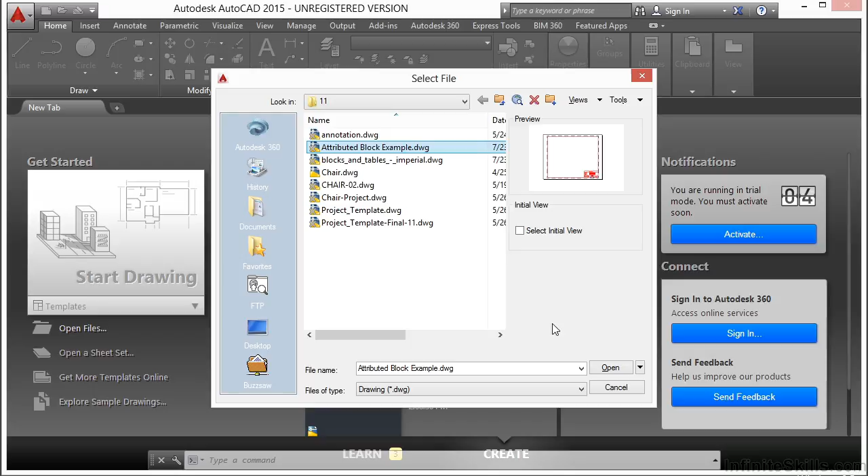This file contains an attributed block that has been inserted as a title block for this drawing. It's right here. So you can see when I hover over it, it looks like it's a block. When I select it, there are a lot of different grips in here. That's for the attributed text. This item here that says prepared for, that's just regular text. I can't edit it or change it or do anything to it.

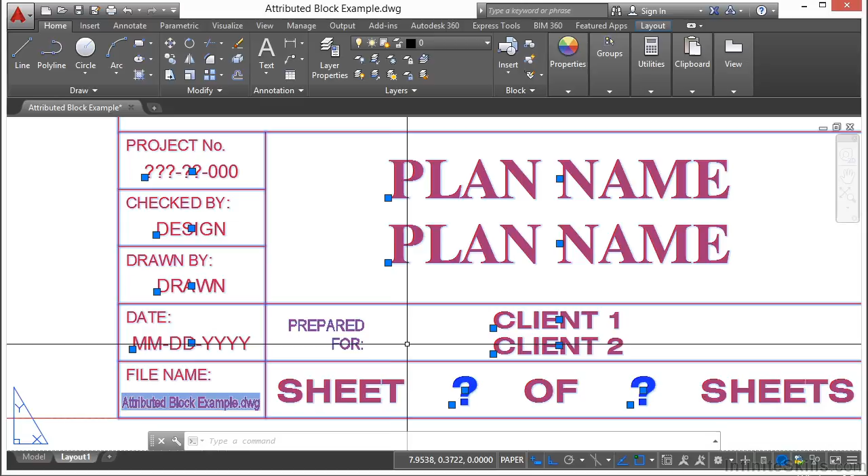Now to edit the attributes of a block, you can double click it. That brings up the Enhanced Attribute Editor window. Here you can edit the text to display what you need it to. We drag this to the side. Here you can see this attribute has a tag. It's called plan, and you're prompted with a plan name number 1 and the value. Plan name or value here is the actual text that is displayed in your drawing.

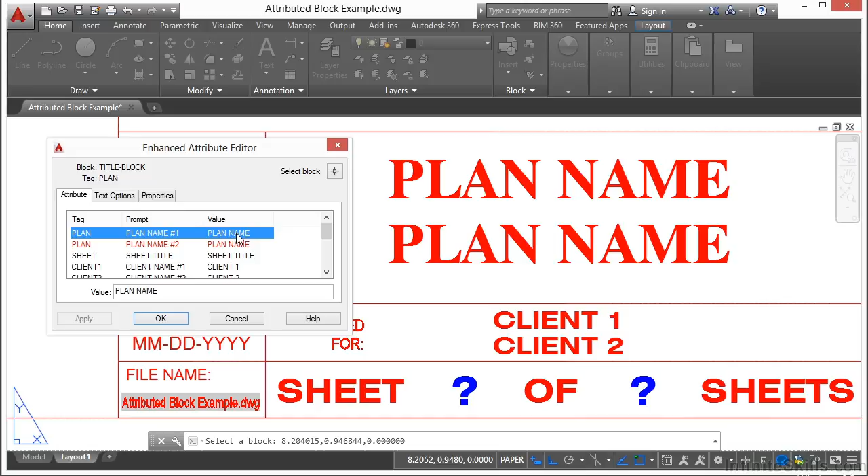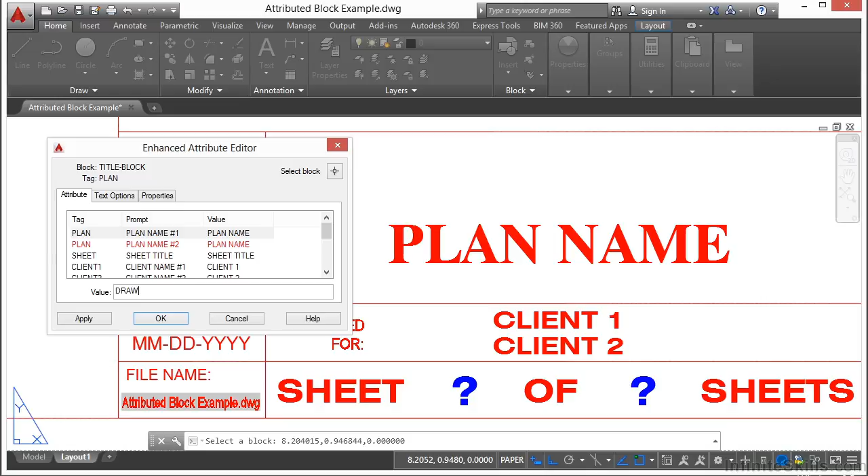To edit that, I click in this box here, and I just change it like I would in any regular text editor. I'm going to call this drawing title. When you're finished, click OK, and you've changed the text in your title block. Title blocks are very commonly used with attributed text. This allows everyone's title block to be formatted exactly the same way and give your drawings a uniform look.

Now here's a quick tip. If you only want to edit one field of data, hold down the Control key and double click on that text field. When you're finished, just left click somewhere off on the screen. Now if you double click it, this gives you access to everything here that you can change.

I can call this sheet title as an example, which is right up here. I can say whatever I want it to be. When I'm done, press enter. Client name, I can just say ABC Company. Click OK, and you can see here that I've changed some of the information on it. Now let's say, for example, I only need one of these lines. That's easy enough. Put a space in there, and now it looks blank.

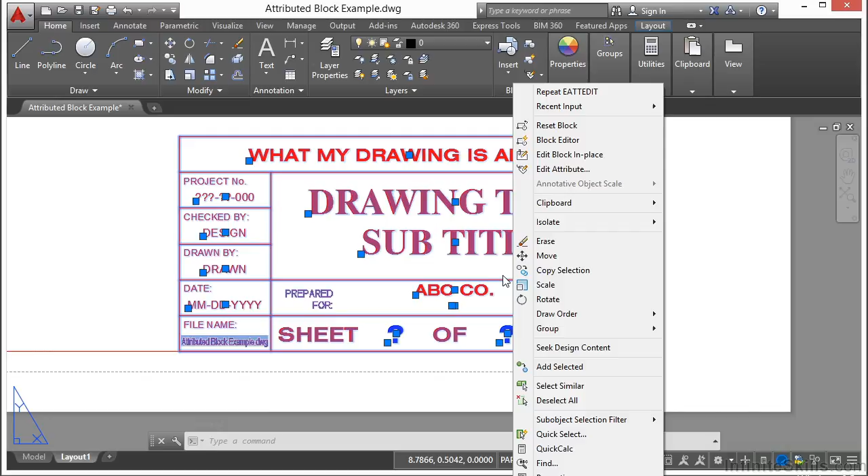Now to create an attribute in a block, you have to create an attribute definition. It's sort of like creating text, only there are a few more definitions to assign. So let's edit this block right here. So select it, and then right click on it, and go to the block editor. I'm going to close this because we won't really need that. It's just going to get in our way. Each one of these objects here are attributed text. If I double click on them to edit them, I get these three options.

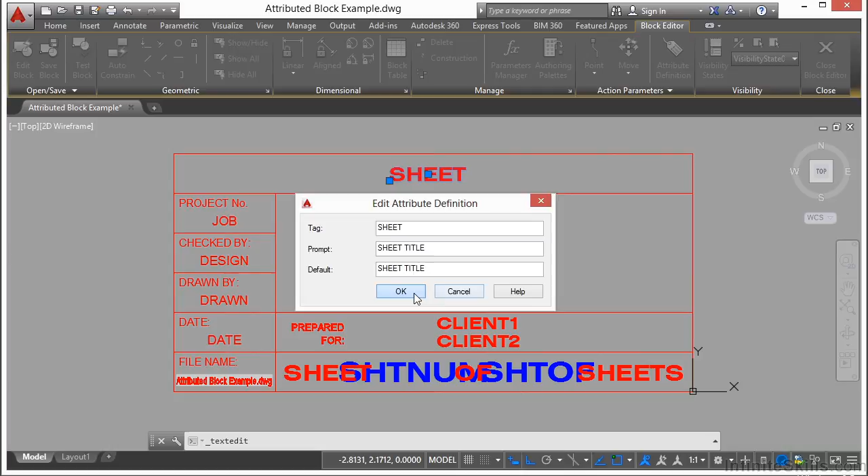I have the tag, the prompt, and the default. The default will automatically fill in this information for you so the user doesn't have to. It's sort of a placeholder. When you're finished, just click OK. Now these have grips so that I can position them however I'd like.

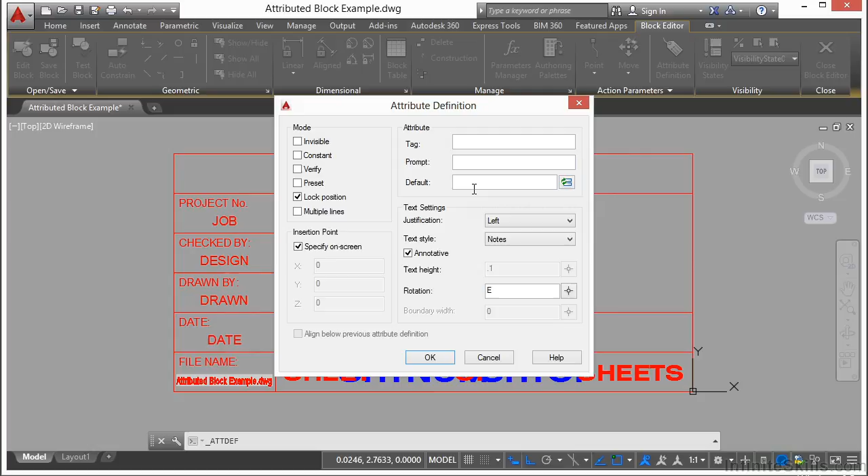And if I want to create a new block attribute, I just come up here to the attribute definition in our block editor ribbon. So this is the attribute definition. I have a lot of different items that I can pick from here, like justification, text style. I can make it annotative or not. I can change the text height. Mostly what you're going to do is enter in your tag, prompt, and your default information.

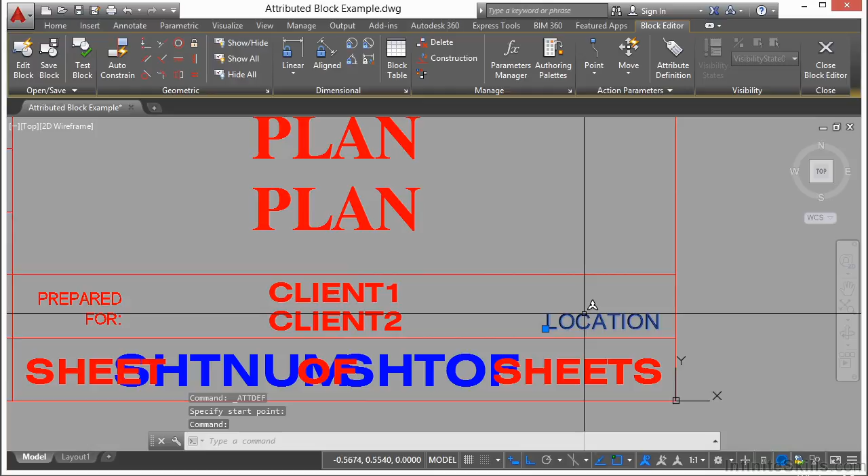So let's say I want to make a tag for location. Now a lot of times you're just going to enter in the same thing, location, location, location. Now when I click OK, it wants to know where I want to put it. I don't really have a spot for it in my line work. I'm just going to put it right over here, just for now. And that's where it is. Now you can also look at things like layer, size, etc.

Now let's select any attribute. I'm just going to pick the one that I just created. Right click on it and select the attribute order option right here at the top. Now this window opens up the attribute order window. This will allow you to edit the order the attributes will be listed when you edit the data fields of an attributed block. Now, it doesn't physically change them in any way, just the order in which they're listed.

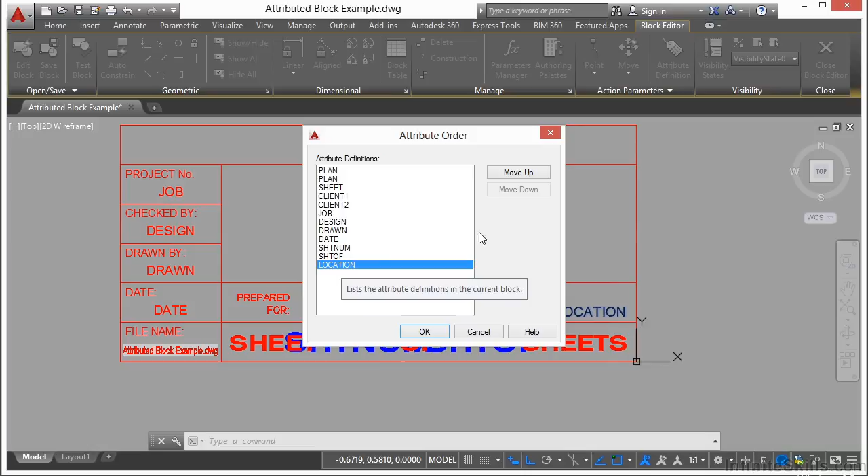So I put in location last, so it naturally goes to the bottom. But let's move it up after the client names. So I'm going to put it up here. So I select it, and then I click the Move Up button. Click OK. And when I'm finished, I'll click the Close Block Editor button. Save the changes to the title block, and you'll notice it doesn't look any different. Where is my location option?

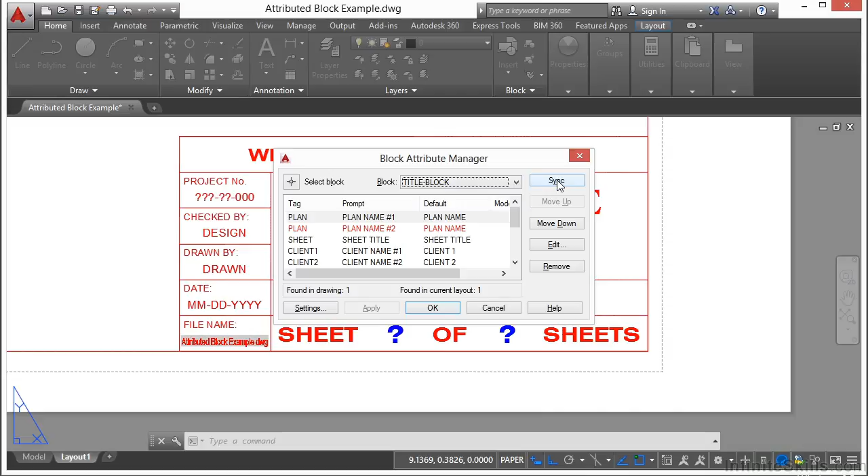Well, there's something that you have to do when you edit an attributed block. You have to use a command called Batman. No, I'm not making it up. It's BATTMAN. It stands for Block Attribute Manager, or Batman. Once you open up Batman, find the block that you just changed, that's title block, and then click the Sync button. And that will update every instance of the attributed block in your file.

Now, I would wish that it would do this automatically for you, but it doesn't. So you have to do that every time. Don't worry, it will be there. Now we can edit our location right here.

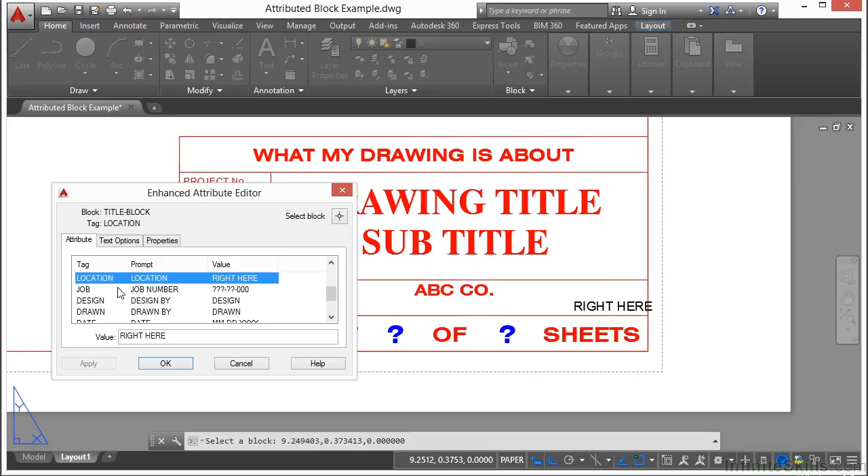Now, if something like this happens in your attributed text, just double click on your attributed block, find the tag that you want to change, go to Text Options, and you have some abilities here to change a few things. You can change the justification, and that might move it. You can change the text height. You can even change the rotation. You can make it annotative or not. You can even change the width factor.

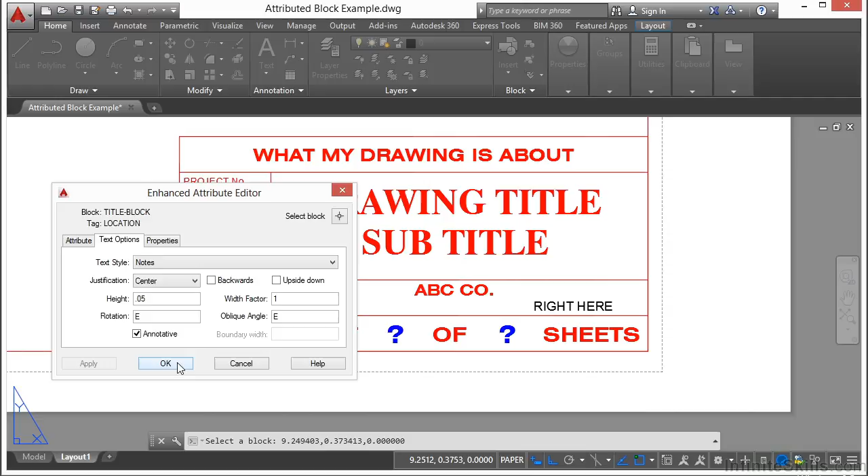There are a lot of times when I've shrunk the height inside something just to make it fit better. It happens. You can also change some of the properties of it right here as well. When you're finished, click Apply and OK. So that's attributed blocks. And a very common use of an attributed block is a title block.